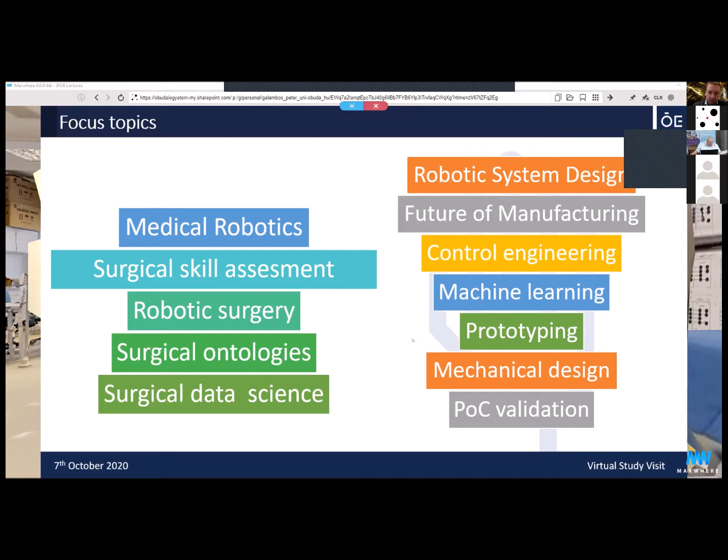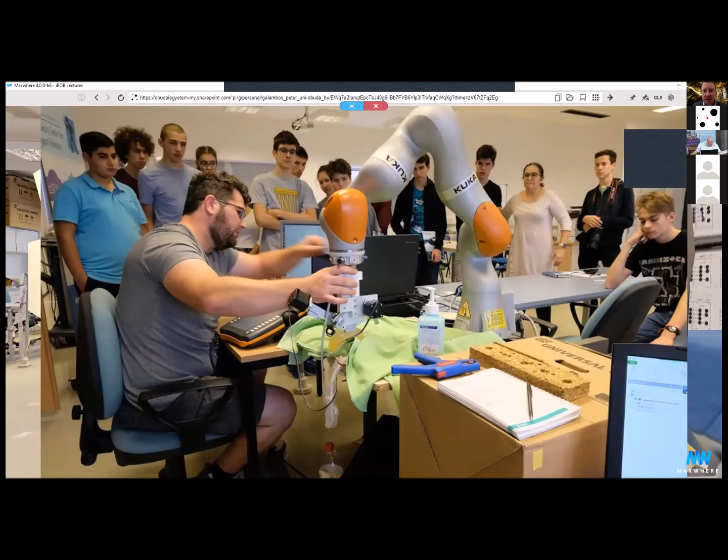We often invite high school students to the laboratory to give them introductory lectures on different aspects of robotics. It is very important to do this in order to ensure the new generation appearance in our university and in the technical community in general.

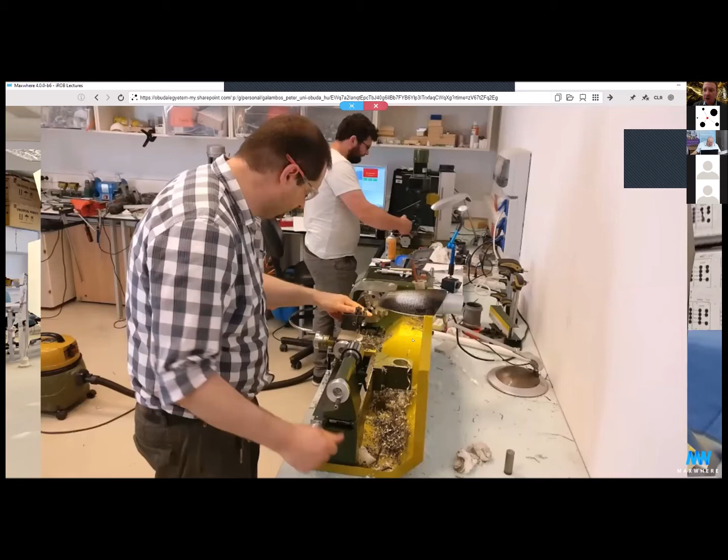We are very committed to real-world problem solving and prototype building. That is why we are operating a not virtual but really physical prototype laboratory, in which I took this photo. I will introduce it later on.

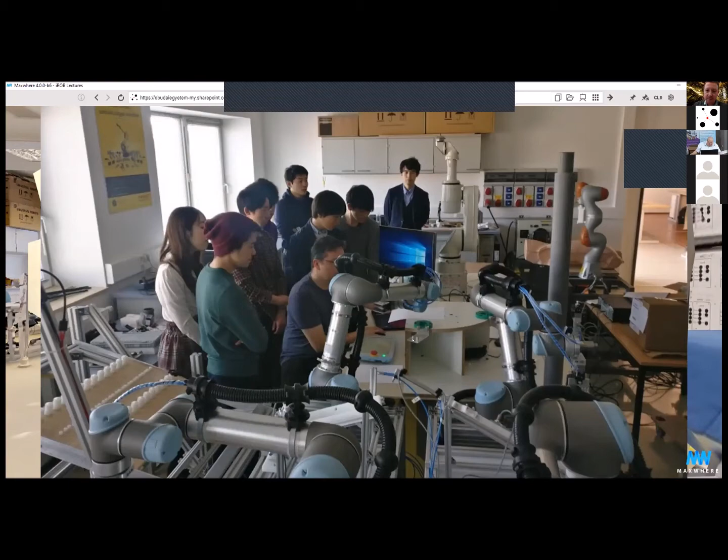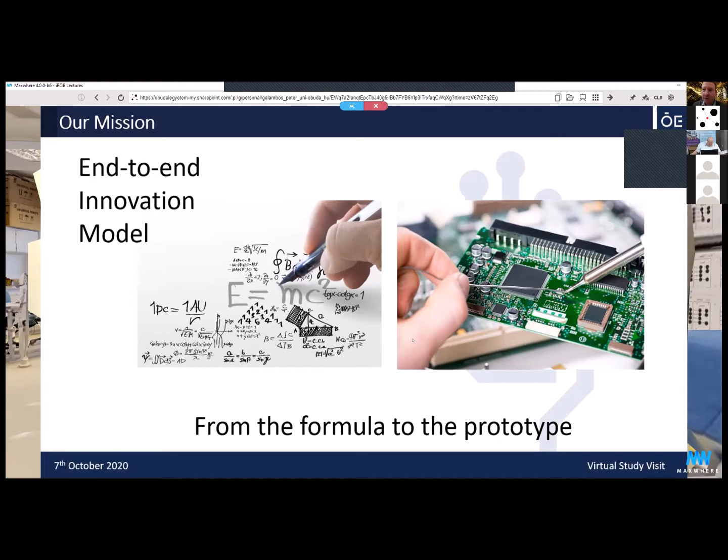Our mission is basically the end-to-end innovation model, which means that we cover the innovation process from the formulas to the prototypes, and our staff is built up accordingly. We do have mathematicians, physicists on board, as well as engineers in mechanical, electrical, and software parts of the problems. As a result, we can provide a complete service to our partners, from exploratory research to practice-driven R&D and system integration.

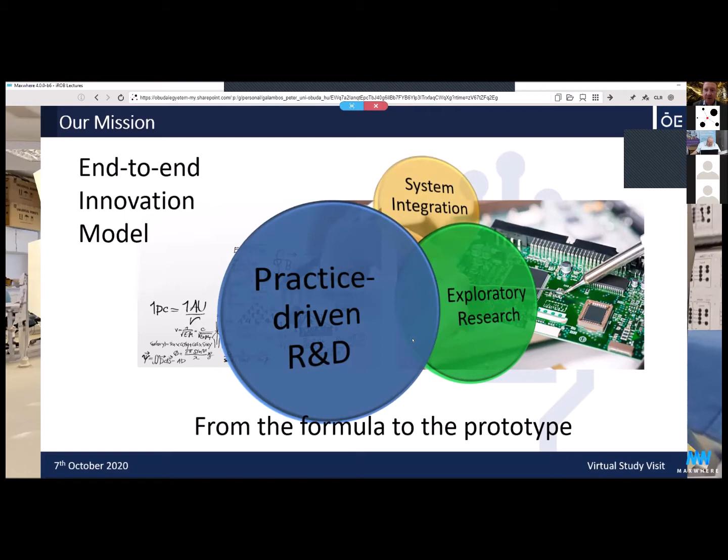Everything is here. It's a very dynamically growing market, so we definitely have to be on this trend. The yearly market growth is continuously over 15% per year, so it's a strong trend.

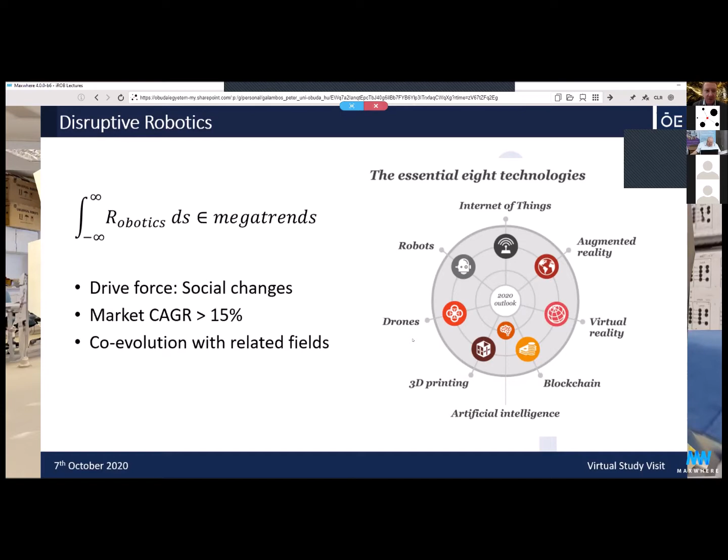Our R&D staff contains 4 postdoc scientists, 6 PhD students, 8 graduate students, which I usually call resident students - who are still in student status, but working with us on our project, even with a contract. They spend about 12 to 20 hours a week to join our research activity. We also have 4 full-time engineers and the necessary administrative staff to cover the project necessities.

Internationally, we are quite active in several organizations, mainly IEEE, Robotics and Automation Society, Systems Man and Cybernetics, and Industrial Electronics societies. We are also a member of the euRobotics AISBL, and we hosted several programs in the frame of this public body. That is why we are trying to increase our activity in Horizon 2020 and the upcoming framework calls and projects as well.

We have, in the medical area, a strategic partnership with the Austrian Center for Medical Innovation and Technology.

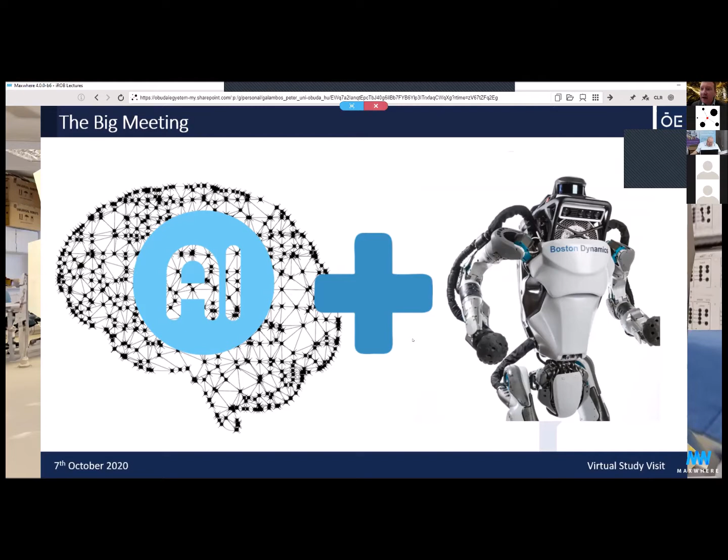But now researchers, including us, are working very hard on this serious issue of how to control dextrous manipulation, and sooner or later these real-time design and real-time planning technologies will be available. We would like to be on the start line to integrate those technologies into industrial solutions.

Today we are going to show 3 different topics. The first one will be the manipulation of fruits and vegetables with robotic hands. This is not really a research topic, but a proof of concept. With this topic, I would like to introduce what I mean by proof of concept validation.

Testing a new technology without involving expensive industrial resources, rather using a living lab to try out a new gripper provided by a company. Actually, it's a real situation. Now we are testing an OnRobot soft gripper, to see if it is capable of really manipulating fruits and vegetables without harming the objects. So we are looking for the answers with this test.

The second topic will be the demonstration of the RoBUTCHER project, a gripper designed for intestine removal during the pork meat production process. This is an EU H2020 project. Hopefully I can show you really interesting stuff from the results.

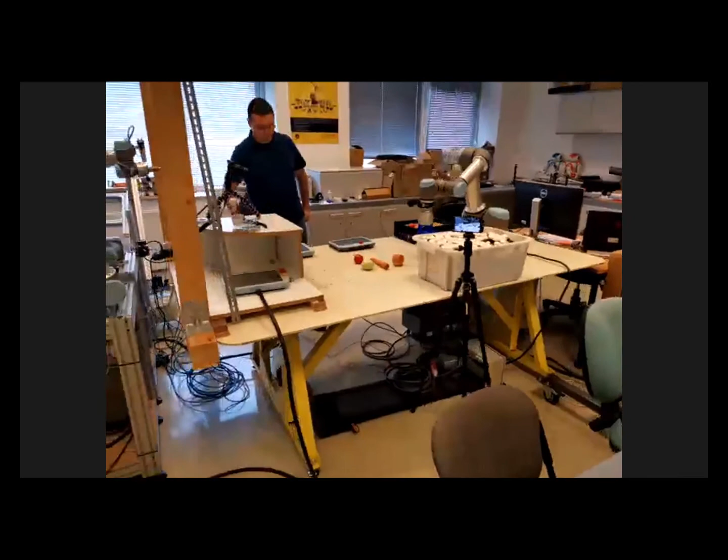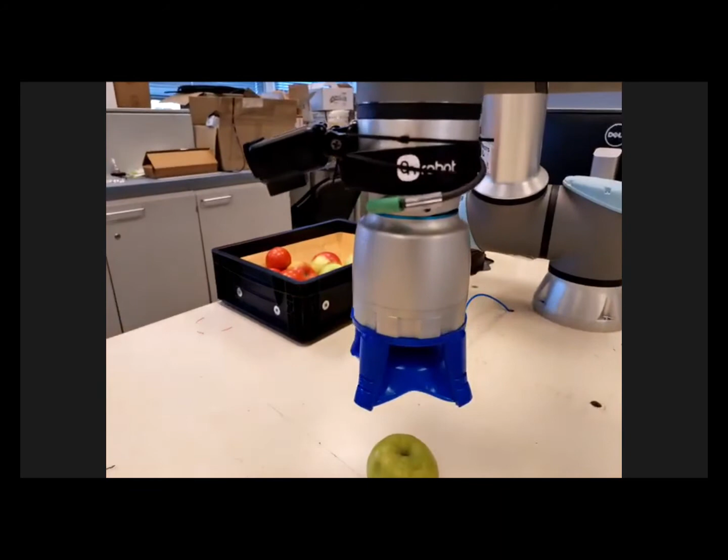So this is our test platform here, and this is my colleague Sándor Tarsoly, a mechanical engineer dealing with robot programming for several years now, and he is responsible for this proof of concept validation and investigation. What we see here is the soft gripper from OnRobot company, a leading manufacturer and technology developer, and they just rolled out this gripper. We are testing how to grab different fruits and vegetables with this.

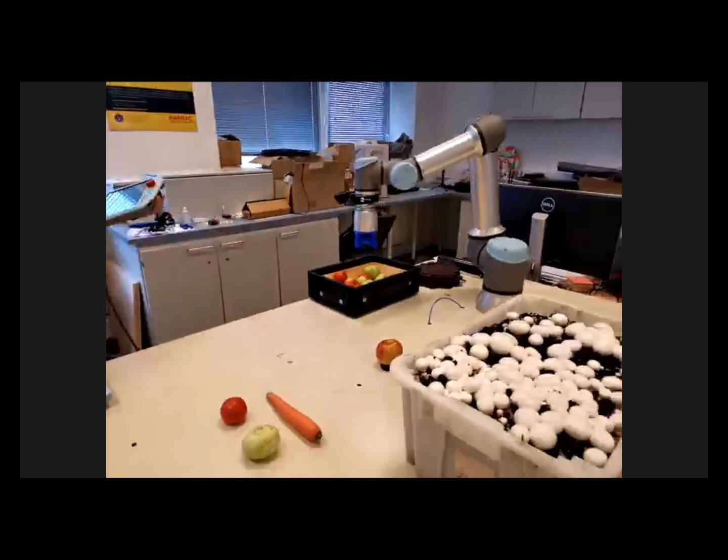I'm sorry to interrupt you - maybe it's only me, but I don't really see anything outside of your profile picture. Bianca, this is my moving camera, the IROB cam. It's working properly for me. Spotlight video, I also see it. Yes, I can see it properly. Great, so it was not a general problem. Well, now it works for me too, sorry. Okay, thank you for the feedback.

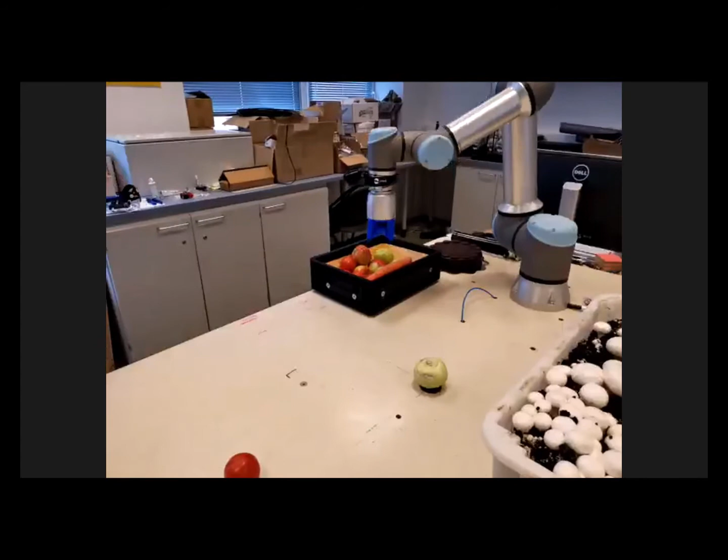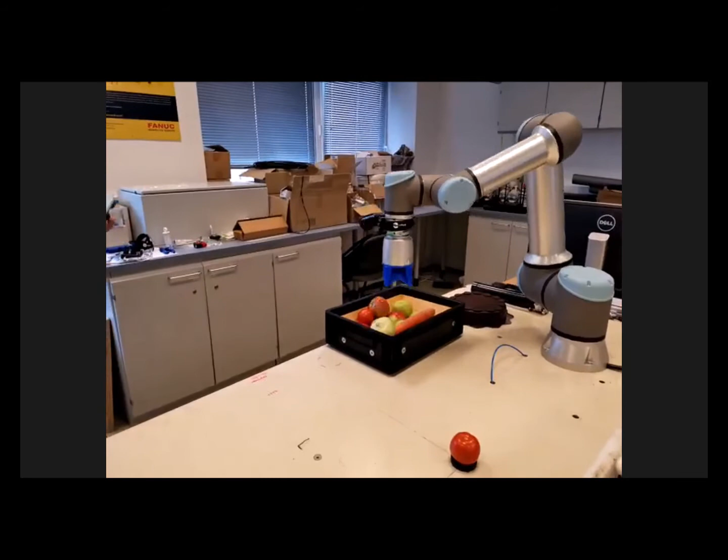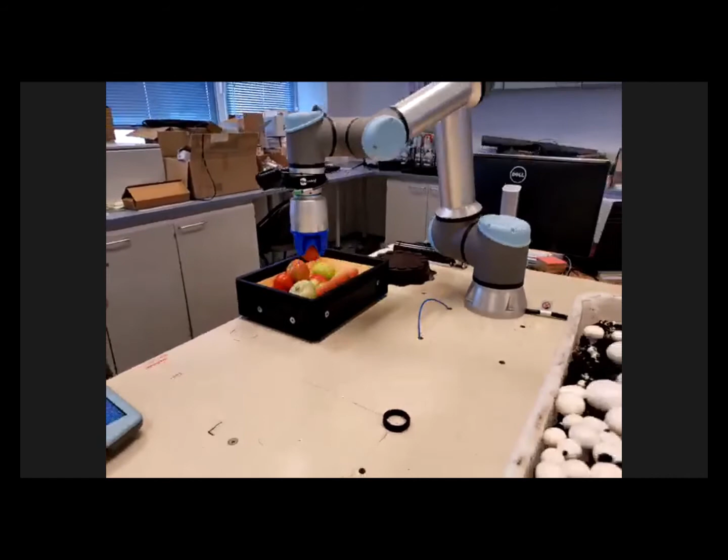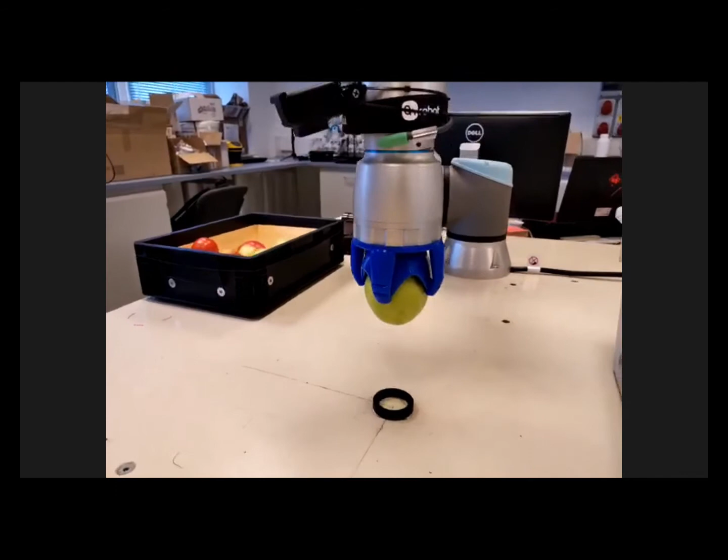So as you see, we place different vegetables and fruits at the pickup position. Then the robot performs the pick and place activity through this soft gripper, which is actually a very simple mechanism. There is a soft membrane with four fingers and one linear actuator in the center of the mechanism actuates this soft body, which is able to grasp the various fruits without harming the surface.

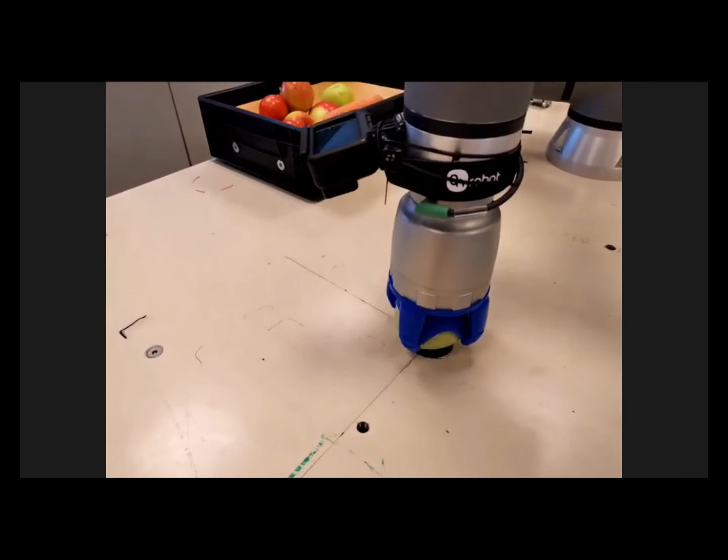The robot itself is a universal robot, UR16, which is a so-called collaborative robot arm. We can conclude that in certain situations this robot soft gripper performs quite well - the grasp is quite stable. I try to get these vegetables out from the hand - I manage it, of course, because it's soft, but anyway, the grasp is quite okay.

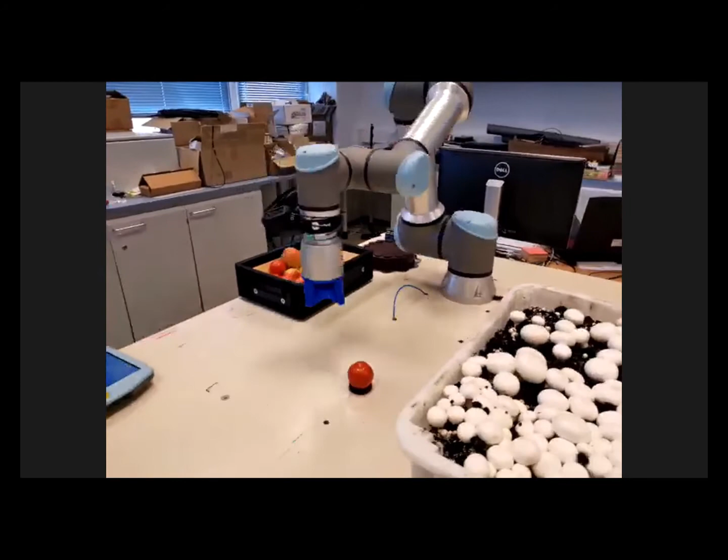Without external intervention, it holds very well.

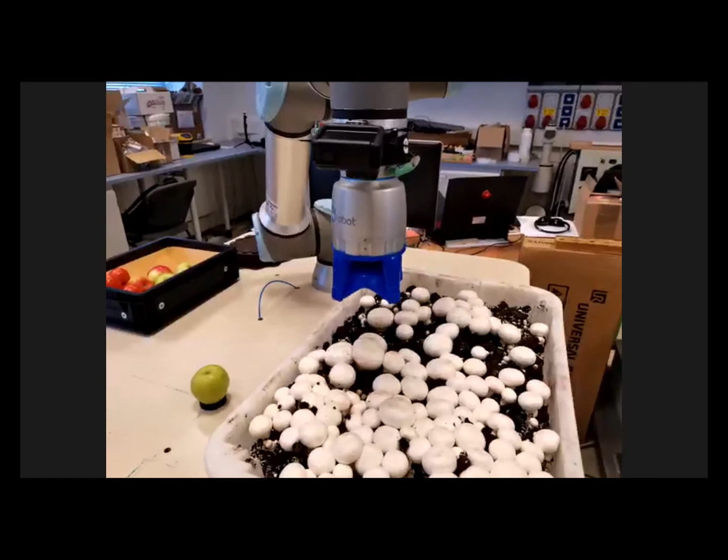We have an ongoing project in partnership with a large mushroom producer, and the task is to harvest mushrooms through robotic technology. We are not very sure that this certain gripper is the best suited tool to harvest the mushrooms, but we will test multiple options to solve this problem.

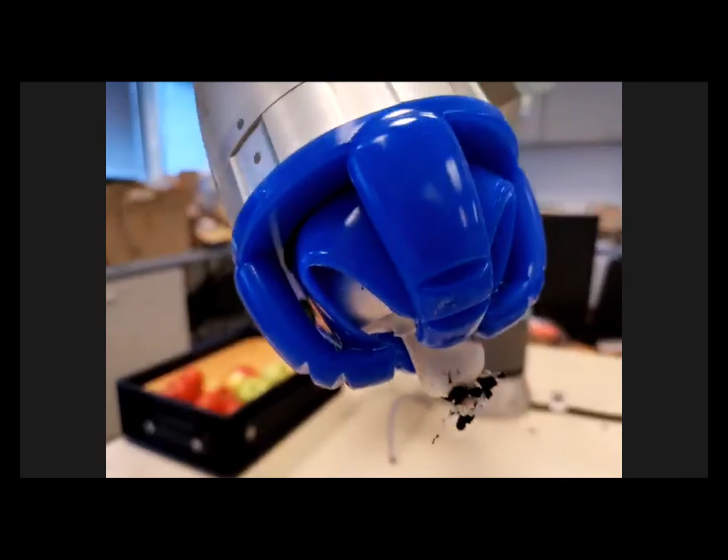This is one option. There are different types of grippers that could solve the mushroom harvesting problem. What is the difficulty here? As you see, the mushrooms are touching each other. They grow very closely to each other, and it is quite difficult to grasp a mushroom without pushing the other mushrooms in the neighborhood.

So the next option we're going to try is vacuum technology to grab these champignon mushrooms.

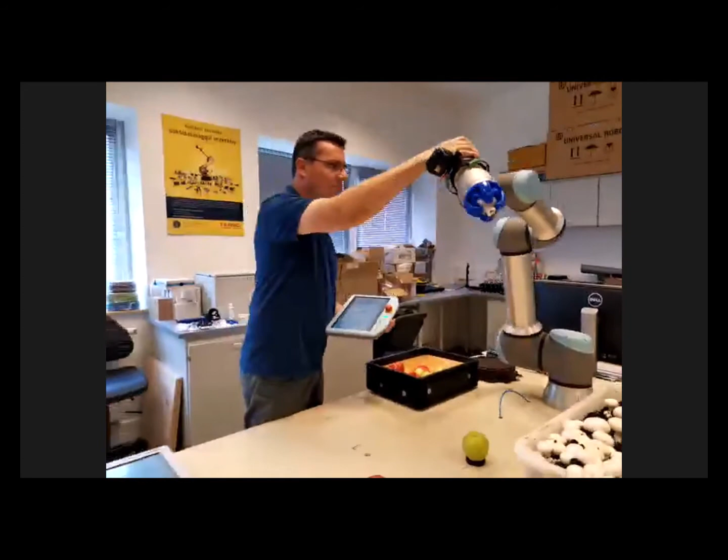Thank you very much, Andor, for this introduction. I go back to my computer screen and continue my introduction with the RoBUTCHER project.

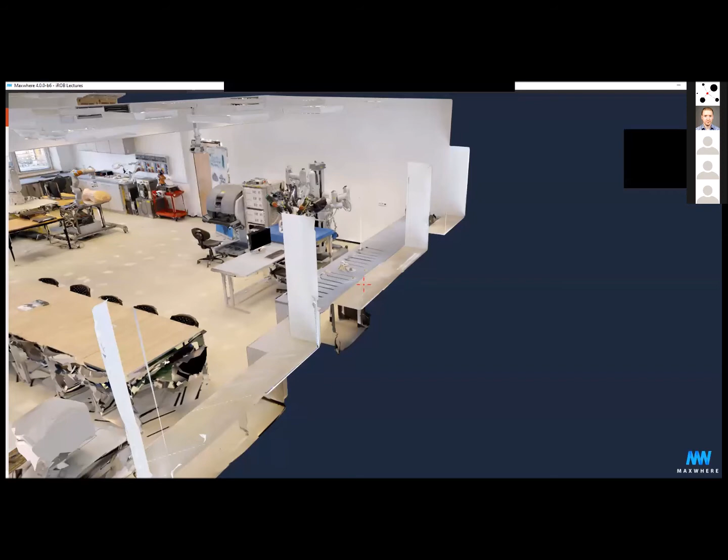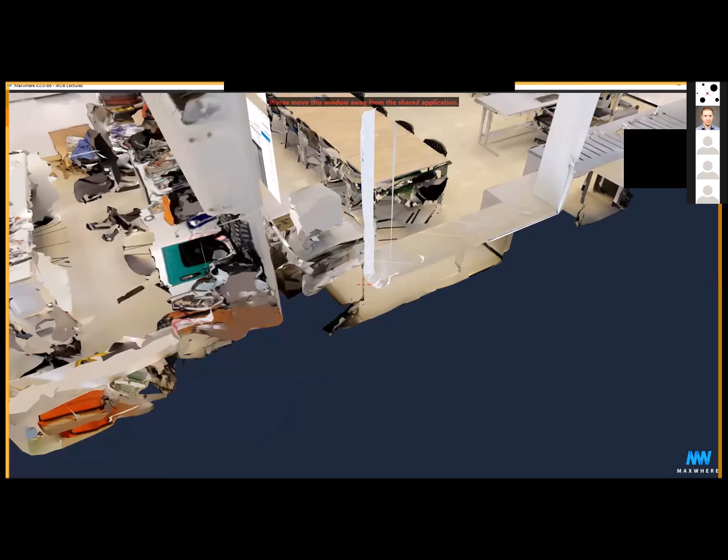Okay, I'm here now. I'm back to the computer screen and starting sharing. Please give me feedback if you can see my screen. Yes, we can see it. Cool. Okay, somehow it's not very smooth on my screen. Sorry for that, I don't know what could be the problem. I'll give it another chance.

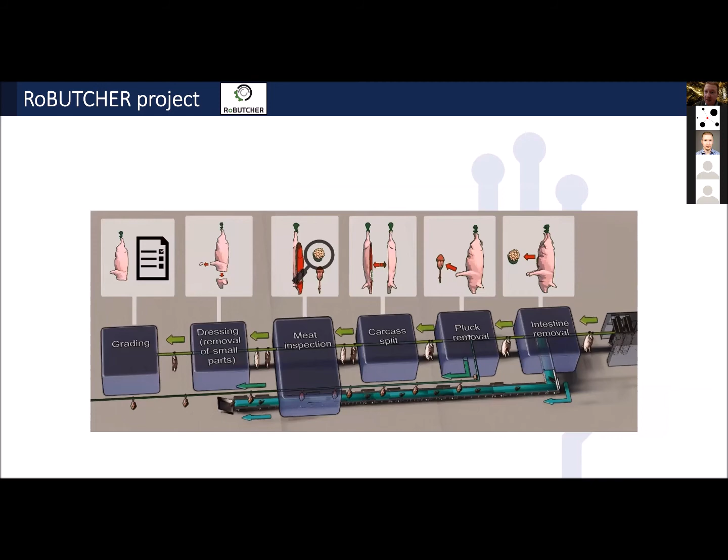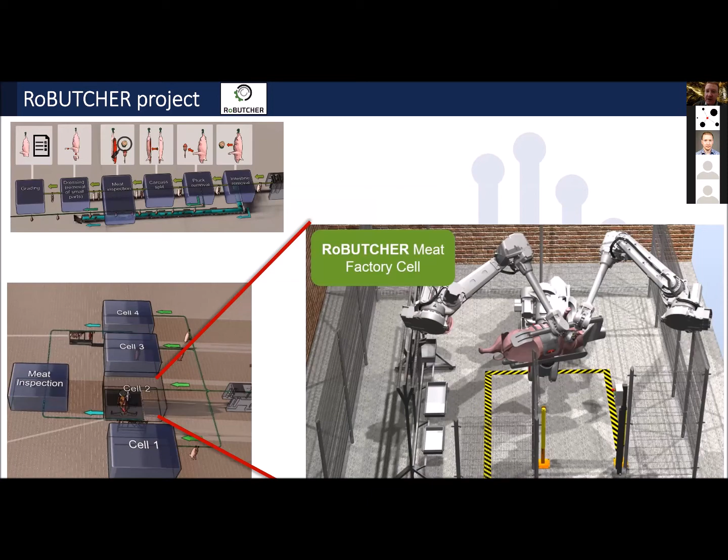Óbuda University's responsibility is the gripper design, for the removal of the intestine and the pluck, the two first steps in the production. In this demonstration, we would like to introduce how our newly designed gripper operates.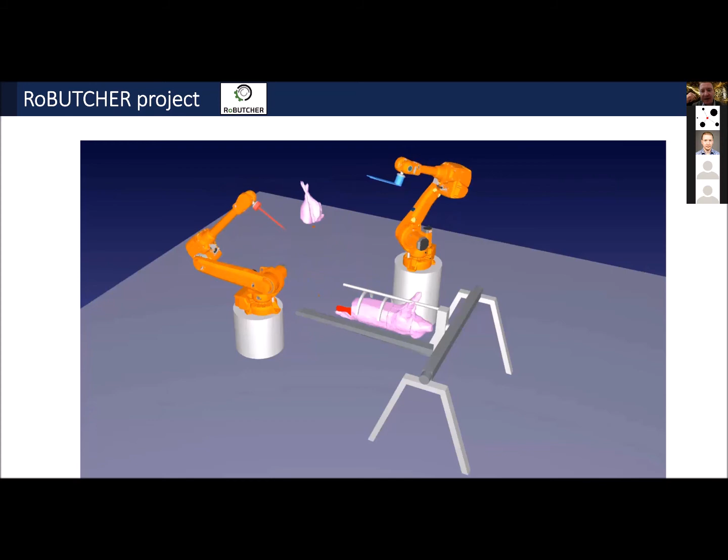On this screen is an animation of how the robots are going to perform the production steps. Our colleagues are currently performing a field test, and I really hope they can join the webinar. I ask Bianca to switch them onto the public screen. The name of their camera is IROB X, IROB external.

It's a bit noisy inside, so I'm not sure you will hear me well, but if you can't hear me inside, Peter can explain in detail what's happening. What you will see is what will happen in one of the cells. We are right now testing our gripper, the first prototype of the designed gripper. We will grasp the trachea of the pig, and pull out all the intestines with this only one grasp on the trachea.

After that, we will show you that with the same gripper, we can also grasp the limbs of the pig. We will grasp one already cut down limb and move it away, showing you that it can withstand more than 10 kilograms of weight. So now we will go inside. I hope you will hear me there also, and I will switch my camera too.

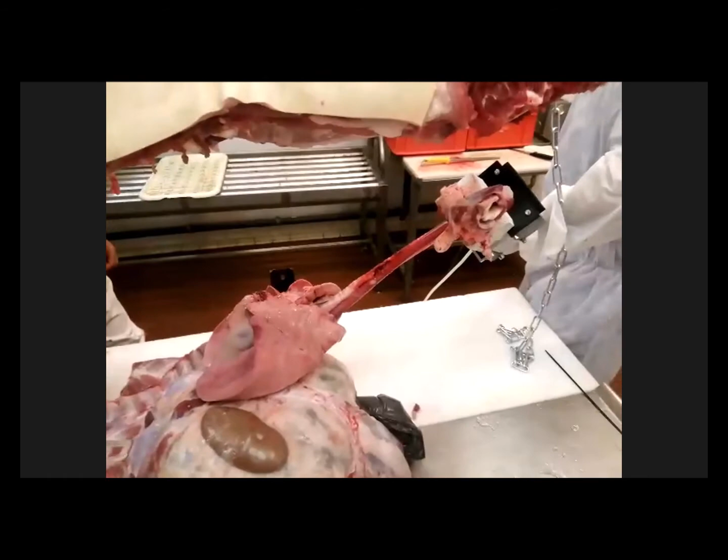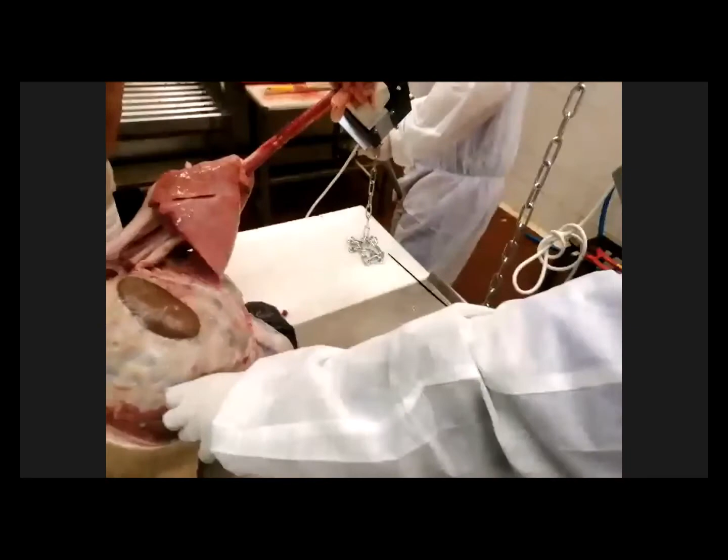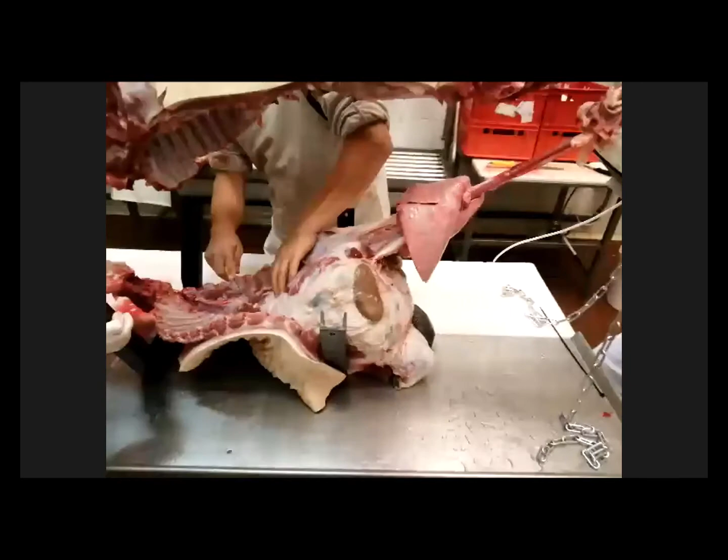Some more cuts are happening right now, and meanwhile we are holding it with our gripper. As you can see, the gripper is doing its job, the whole thing is together yet. We can hold it quite firmly with it, and it can withstand this huge force that we need to tear out all the intestines. As you can see, my colleague is expressing quite much force.

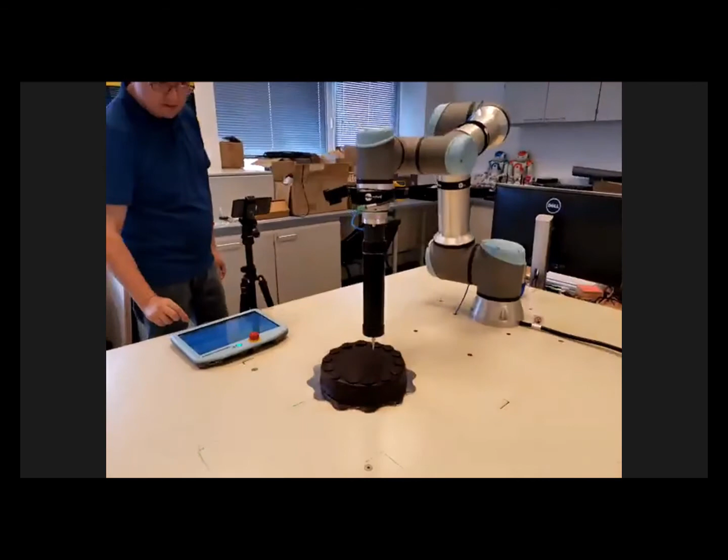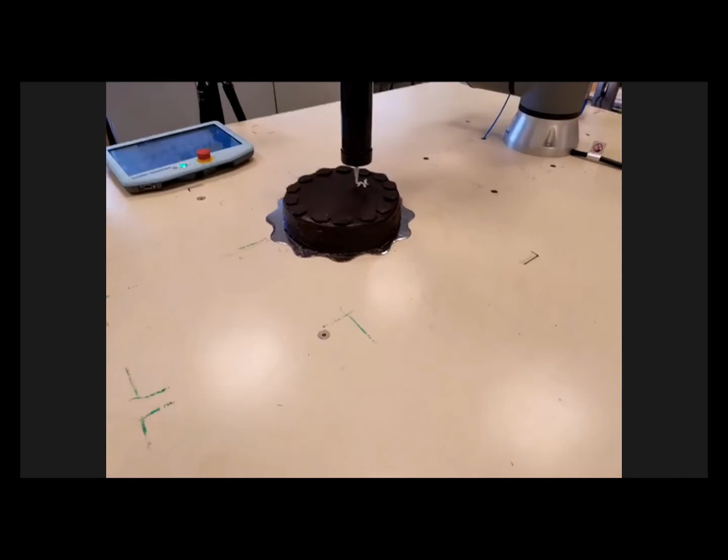And the final presentation is this cake decoration. Sanyi, please start it. In the meantime, I'll introduce: this is again our universal robot UR16 equipped with a pneumatic dispenser of sugar cream, and using the robot manipulator and the pre-programmed decoration, we execute the cake decoration in an automatic way.

Actually, this is again not a very new technology. Industry-wise, there are some manufacturers who can provide such functionalities in real industrial environments, but those techs are usually less affordable, needing more expensive manipulators and dispensers. We committed to provide solutions for small and medium-sized enterprises to make possible the setup of new production lines with ease.

We had some problem here. There might be some air bubbles in the sugar, and that is why the robot didn't draw anything for a while. But now it's okay again, and the happy birthday caption on the cake is underway.

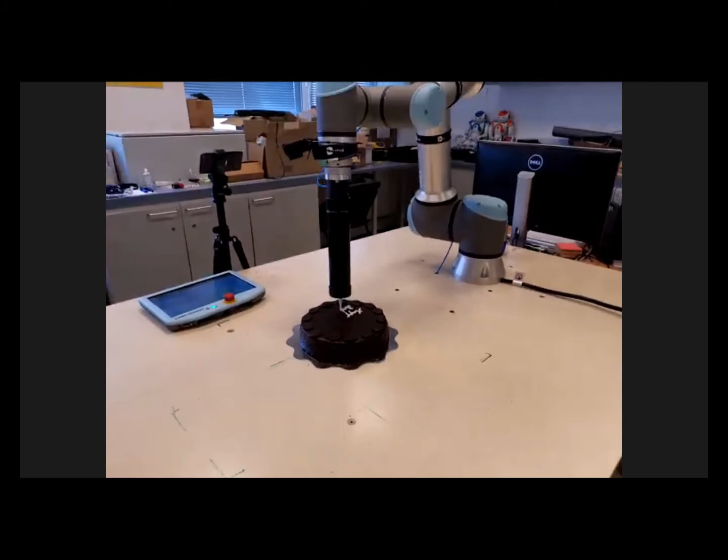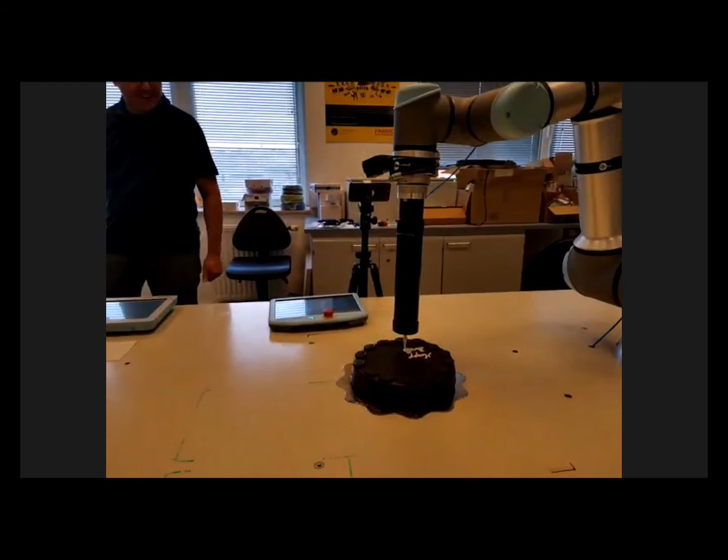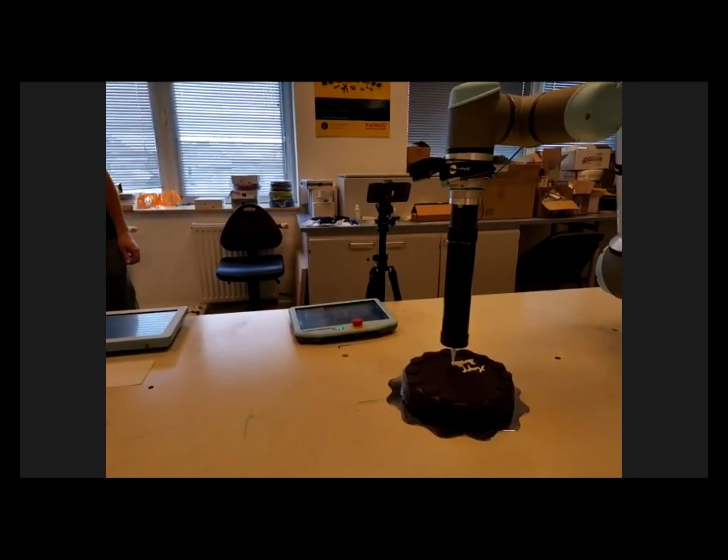Okay, the consistency of the sugar is not constant, so it influences the quality of the text pretty much. It requires a very serious setup. Some characters are readable at least.

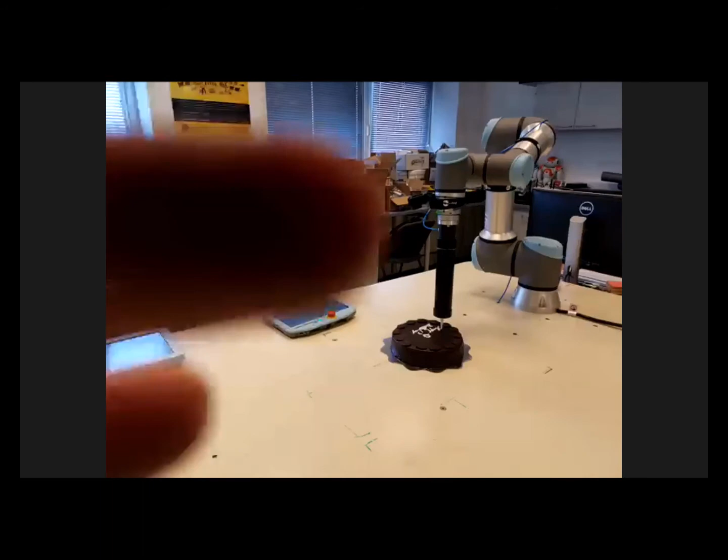Okay, and thank you very much. This was the final moment of our presentation. If any questions, we are happy to answer.

Thank you, Peter. There were some questions in the chat box. Can you hear me, Peter? Yes, I'm here. So one question: how can SMEs be somehow pushed or convinced that robotics is closer to them than they think?

That's a very good question. We are communicating with SME leaders quite often, and they are not in an easy situation because the sales margin in this sector, especially in food industries, is really small, and the risk of such robotization investment is high, and that is why the decision for capital investment is very, very difficult. So our laboratory is open for cooperation before any serious investment to try out a new or existing technology and make it very clear if the given technology is able to solve the task or not. Programs by the government and by the EU can help a lot to answer these questions.